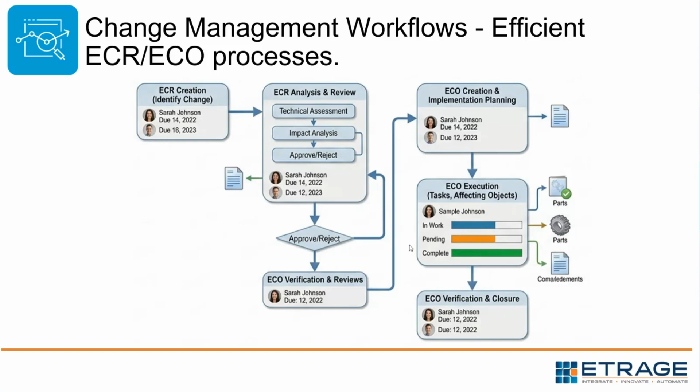Yeah, and then as I said, you then set or attach effectivity to this product, and that effectivity, Windchill system specifically gives you different types of effectivity you can apply: date effectivity, serial number effectivity, and lot number effectivity. So that can be set on the system as well.

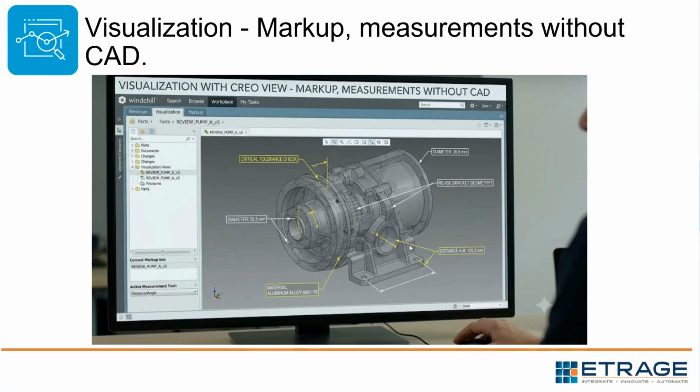And lastly, before we get into the system itself, if I am the approver of a promotion process, I don't want to go in and modify the file, or have to have a Creo license, a SolidWorks license to view this file. So a PLM system should be able to provide me a non-CAD viewer that I can use to mark up and measure the model and save these markups back into the system without impacting or modifying the actual model. Okay.

Right, so for the purposes of today's demo, I'm using the latest Windchill version, Windchill 13.1. One of the notable changes on the new version is they have just implemented this new home view. You can still turn it off to take you to the old view of tables, but yeah, this new view gives you everything just in the interface here.

Tasks that are assigned to me, anything that has been checked out to me that I'm modifying. Some report on here that shows how many of my activities are still open I need to get to. And then from the site here, I can quickly jump onto any searches, or I can directly go to my products from here.

So I will go into the folder view of this, and then I am interested in one of the models here under CAD, the crankshaft assembly model. So this is the product structure for this. The first page there, it's capturing some attributes, information in here, some metadata information.

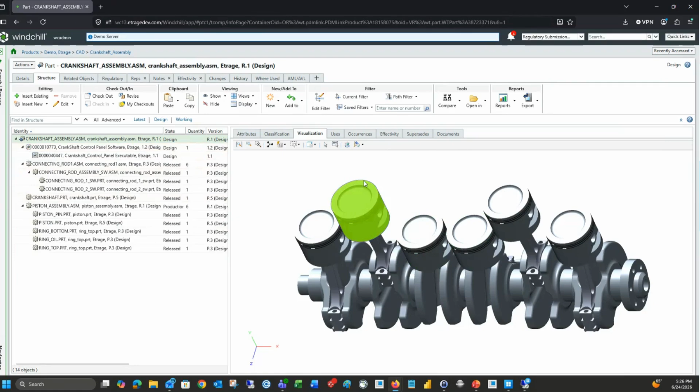But there will be other components that are not things that you design, but are things that are part of your bill of material. An example that I want to just mention in this case is the software. So if there's a software that needs to be installed as part of my crankshaft assembly, so I'm having a smart crankshaft assembly here. So it does have a control panel that I can use to control it. So I can go in and attach the component that represents the software on here.

And then alongside that software, I have installed the actual executable that is ready to be installed on that control panel for it to work. So I can attach that, or I can also attach the source code for it. Can also show you how to quickly do that.

If we have aftermarket service information that we want to attach to this, maybe maintenance manual, service manual, we'll simply go in and create a new part in the structure. And depending on what sort of modules you have installed on your Windchill, you'll have additional types on here. So types of objects I can create, like manufacturing parts, just the normal parts, the software, the service BOM parts.

So I can go in and say, I want to create a part. This would be for aftermarket manuals.

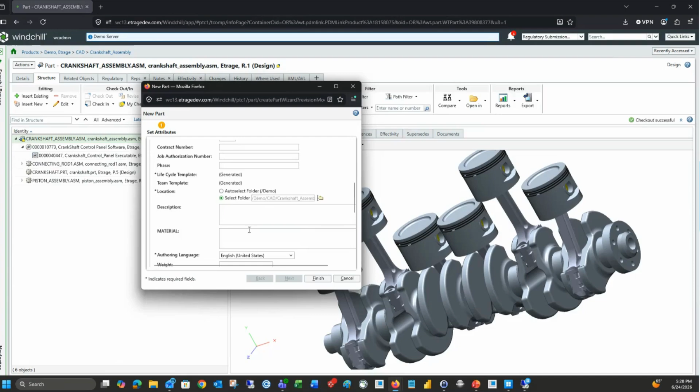And I can specify the source as well. Are we having an external contributor create this manual for us, or is it something we do in-house? And I can also specify the view that I want to use for this. Is it the manufacturing view? Is it the service view? Just leave it at the design view for now. Then I can give additional information that goes with these manuals and just finish.

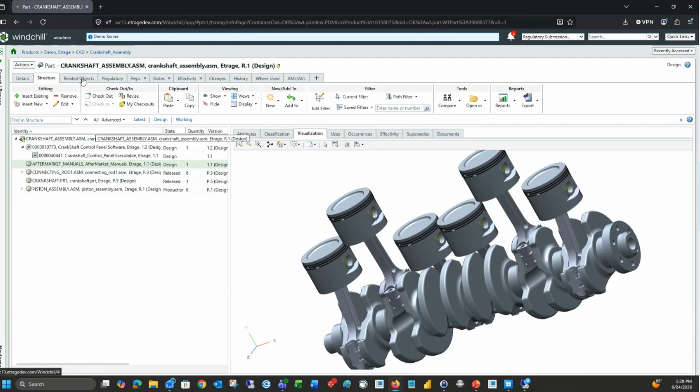Then that part is now created as part of my bill of material here. And at this stage, I can go in and attach the documents directly to this component, the documents that reflect those aftersales market manuals. Then if I go to the related objects for this crankshaft assembly that I have here, you'll also see that I can go in and attach all the related documents for this. I have some design FMEA documents, the requirement document, and also a service document manual for this as well. And at the bottom there we have drawings for that.

And then the other thing that we talked about that I thought is just important to mention is the effectivity. So I can also go in and set an effectivity on a part. And there are a couple of ways to set it. I can set effectivity based on a specific context. So I'm saying I'm only using this part in this particular assembly starting from this date. Then I can go in and set my information, my date ranges that I want to use for that.

But if I want to set it to apply across where this component is being used, I don't need to specify context for that. So I can go in and just do that here. Just this as an example to show. Maybe say from next month, we'll start using the changes on this until the new change comes in. Then we can also say it must be the exact date that will start applying this effectivity. So that's been added. And as I said, this can be applied for different contexts where the part is being used. I can create multiple effectivities on this for that.

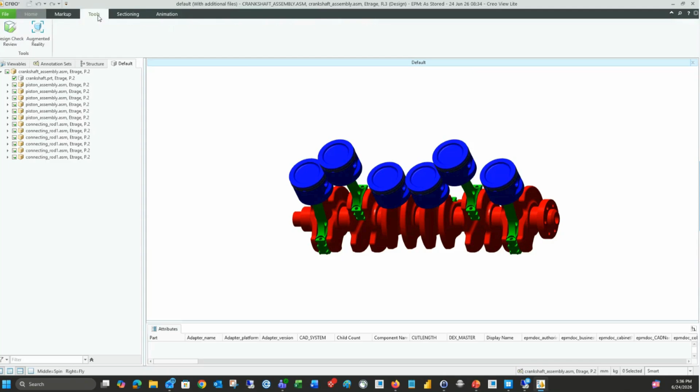So I'm just logging into Creo View in the other screen. Yeah, I can simply open this file in Creo View here, load it into my reading area, and this Creo View has got some functions that I can use in here. So if I want to, for instance, look at the diameter of this piston here, I can do that. It gives me that information.

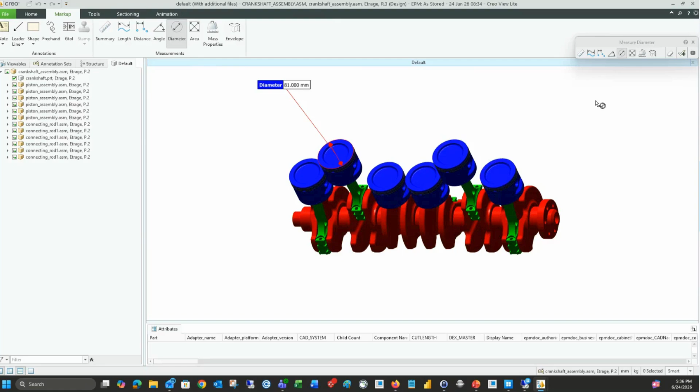So even if someone is on the shop floor and some of the measurements are not properly showing in the drawing, they can use a tool like this to open up the model or the drawing and start marking up and getting those measurements. And those red marks can be saved back into the system.

So at this point, as an approver, I'm happy with my file there, so I'll go in and approve it. One thing that I wanted to also mention at the bottom here is if we needed to send this back to the user, we will send it back for rework. It will go back to the initiator of the promotion process.

Or if we're no longer going ahead with this release, we can go ahead and just reject it. And then we'll send them a notification, and maybe include the comments why it's been rejected. Then I complete that, and that file will now be released. So my file is now released.

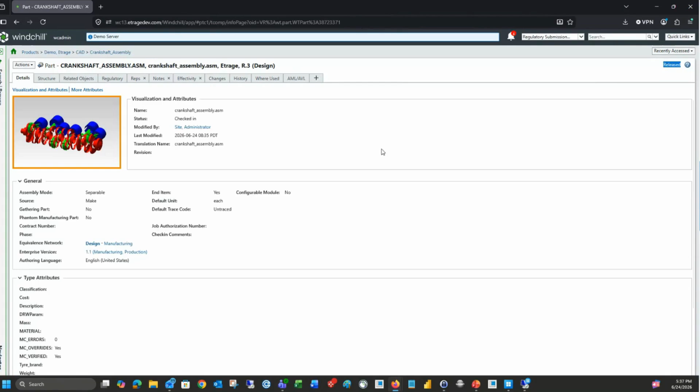And for audit purposes, if I go back to the history tab here, and I look at my version here, 3, which is this last one here, I can see who authorized this release. I can go in and interrogate who was the approver, who actually created the file, who was the reviewer as well.

Same with the change process. Once my file has been released and I need to change this file, we can first create a change request and give it a name. CR1, why we're creating this change, maybe it's a design issue, and if there's any end item or the final product we're selling that has been affected, I can add it in there. This will add all the affected objects.

If there's additional files that are affected by this change, I can add them at this stage, and then go ahead and create that change request. And then obviously the change request has got different roles to it: change admin 1, change administrator 2, and 3. Change admin 1 will handle the review and the creation of the change request. And then once that's approved, change admin 2 will then go in and create a change notice.

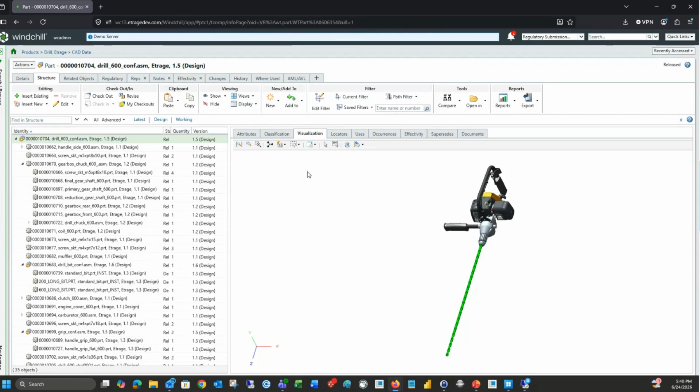The one other thing that I want to show quickly here is configurable products. Because a product can have so many variants, there is a way to manage that using just one overloaded assembly in a Windchill system. And I'm just going to show that quickly with this simple drill bit assembly. So what I have on here, and by the way, this is a functionality you already have.

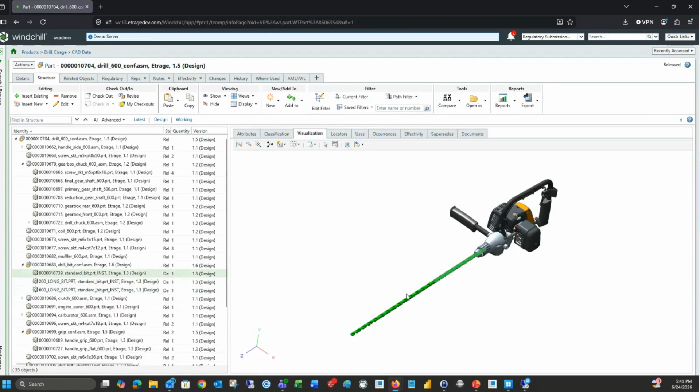There's just preferences that you need to enable for you to start using configurable models in Windchill. So with the example that I have here, I have a drill bit. My drill bits there have different sizes. You'll see, I highlight there's actually different sizes of this drill bit: the shorter one, the longer one, and the longest.

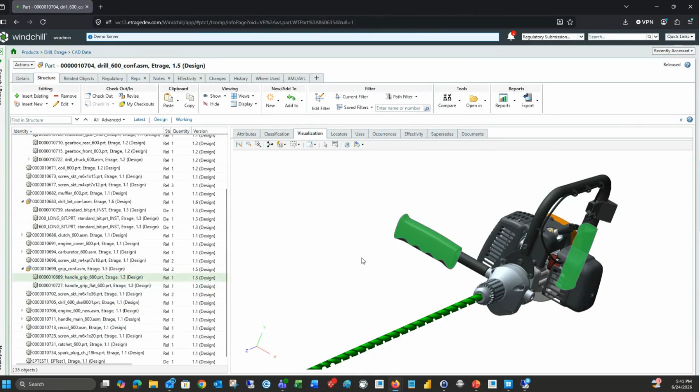And then the other one is with the grips. I have the smooth grip, and the other one that has those finger grips on them. So those are the two that I have for these options. So as a salesperson that is selling a product to a customer based on their requirements, they can simply go into this configuration and then modify this based on what the customer wants using the options.

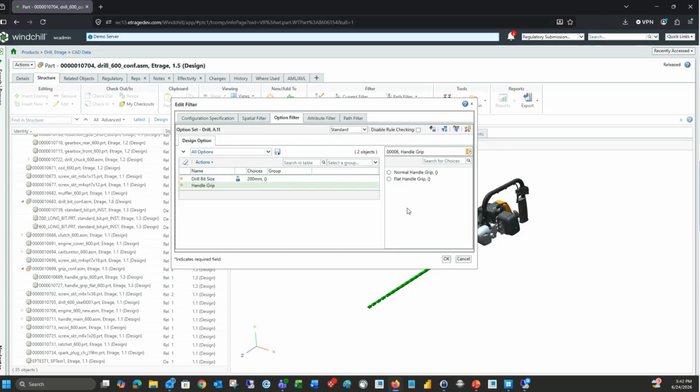So using these options, I'll go in and say, this is the drill bit size we're looking for. And then in terms of the handle grip, we want to go with the normal one. And then I apply the configuration. And immediately from here, I can view what that bill of material will look like. I can see what the actual product will look like. And you will also see on the bill of material on the left-hand side here, this has been filtered to only show me the configurations that I have.

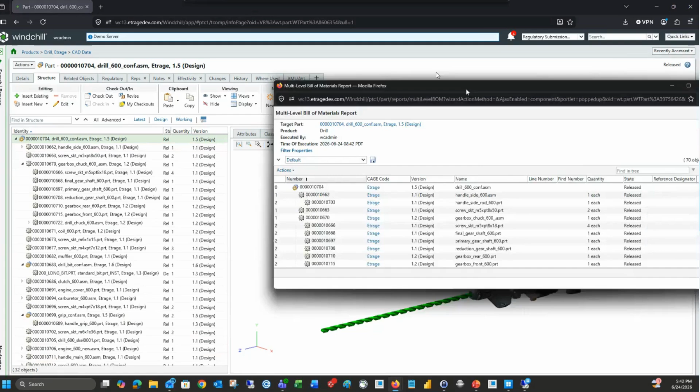And at this stage, I can go in and generate a multi-level bill of material based on this information. And it goes and generates this bill of material that I can take and export out to Excel, or it can be released into a specific file that can be automatically pulled into an ERP system. That is all I wanted to show for today.